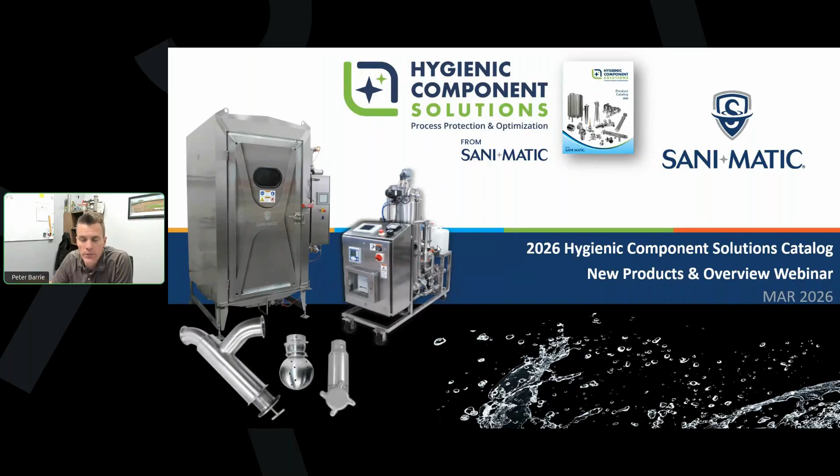Before we get into the agenda and a little housekeeping, just a couple slides on a quick recap of our 2024-2025 updates. If you have not joined the catalog webinar in the past, we do update our catalog yearly about this time. The new catalog came out in late February, and each year we have a handful of new products and new informational additions to our catalog. So 24-25, a couple busy years.

We made trap strainer spare parts kits. We added the angle line strainer drain sample port option for our angle line, so you can put a sample valve or a cap port on that. We are selling our slip collars if you're looking for a hygienic process connection to weld in, we sell those now loose ship.

We added our high purity products, so we'll go through the catalog section in a minute here, but our high purity is more for our pharmaceutical end users, and now we have a whole section for things like our high purity HALB strainer, our hygienic spray deflector, some directionally drilled sprays, some vents, process components like that.

We do have also small sections at the back on process tanks. Sani-Matic does build quick ship tanks for CIP or other process, so we added some information on that, on standard sizes, as well as our newer digital process recorder. If you're using any sort of paper chart recorders, the DPR or digital process recorder is a good option for an electronic cloud-based reporting upgrade from a paper chart recorder.

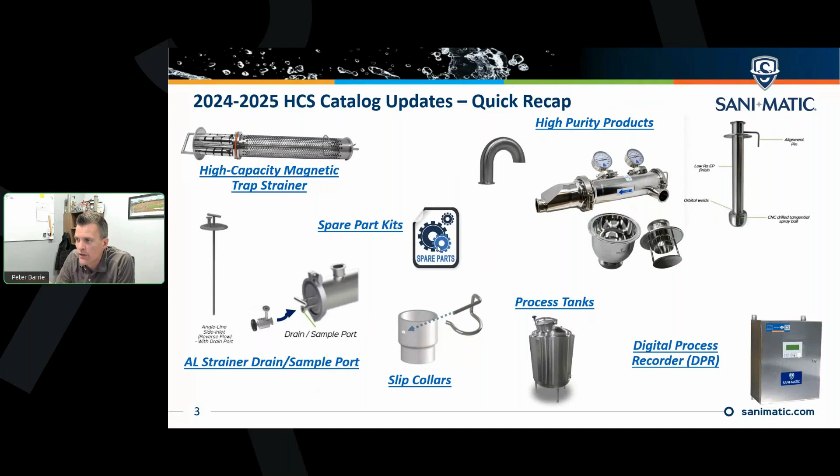And then in 25, more recently, we added a couple new options for our Y strainers, one of them being hot water jackets. So if you do have any products or applications like chocolate that you are straining out and need to flow through hot water to keep it up to temperature, that's a great option.

We revamped our sample valve offering, so a new lower cost, higher temperature offering. They're shown as the 1/2 inch, 3/4 inch tri-clamp sample valve, but we do have some larger sizes there on the process side.

We did add a new static spray ball option, a generic pattern 270 up, so those are good for more simple tanks. If you need to just clean with some cascading sidewall, but maybe don't have any agitators down below, those are good options for those type of applications.

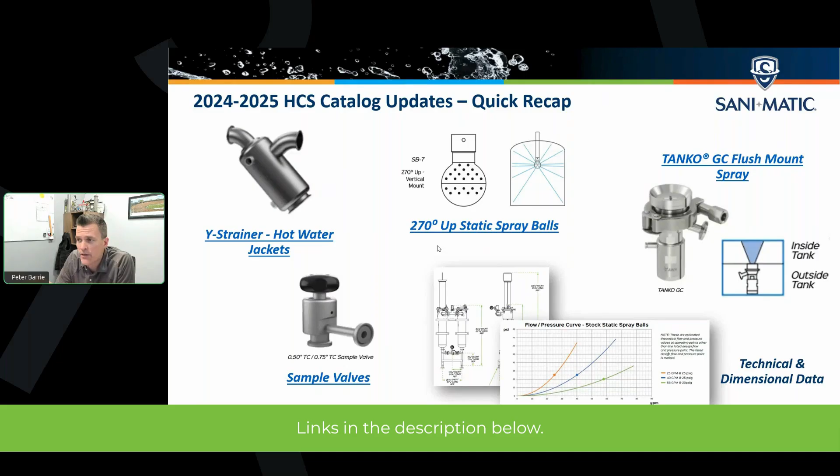And then we added a bunch of technical information, dimensional information, as well as a new Tanko GC flush mount spray there. So if you have any interest in any of these, I do have the slides in the attachment handouts, and all of those blue links will take you right to that section of the catalog.

So today's agenda: we will go through the new catalog, just a quick overview of the table of contents, talk about the layout and some of the products we have.

And then we'll go into some of the new topics here, MicroPerf strainer overlays and underlays, excited to talk about those, a good alternative to mesh overlays if you've used those in the past.

We have a new biofilm sensor, great product there, and new COP basket, new Y strainer hammer handle option, excuse me, a new ultra capacity angle line chill guard strainer, so a specific industrial application for those strainers, but we'll walk through those.

And then IOM manual access, we have those linked now throughout the catalog. And then some other new options: passivation options, differential pressure kits, some more technical information added to the catalog as well. And then we'll take a look at the catalog itself in the digital version, so show you some of the features in there.

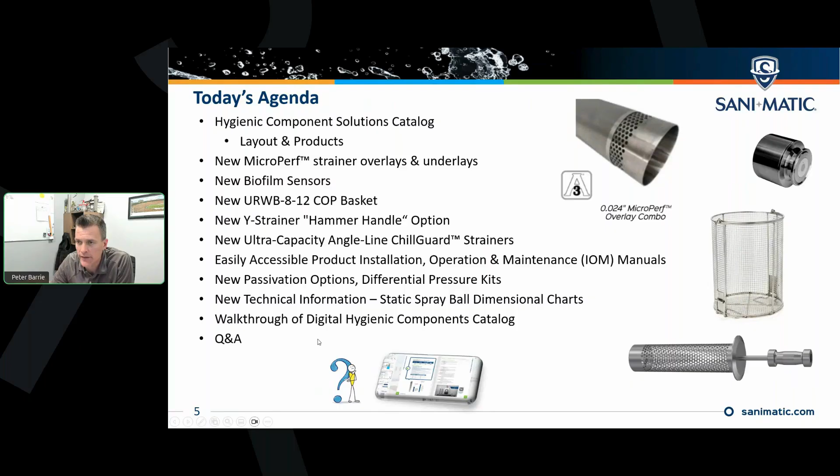All right, so we'll jump into it, just to orient those maybe more new to the catalog. We did revamp and readjust the catalog a couple years ago. We have 4 different sections here. The biggest section, kind of the meat and potatoes of the catalog, is what we call our hygienic components - everything from a lot of different strainer options: straight line, angle line, ALB, ultra capacity angle line, chill guard, T-line, Y strainers, basket strainers. So a bunch of different strainer options.

Our spray device offerings include our static spray balls, many different customizations there, along with rotary and jet sprays, and then some additional rotary and jet sprays as well. Supply tubes, and then tank components is that last section. We do have our tanker spray washers, so if you're cleaning out larger milk tanker trucks or other process hauling tanker trucks, that's towards the back. And then our newer biofilm sensors are in that section standalone, as well as some other accessories.

In this section, you will see at the end what we call a CDP, or component documentation package section. So if you're looking for anything like material test reports, 3A certifications, or sometimes weld log, weld map, finish, weld finish notes - any sort of documentation packages in this section, you do have to order a separate CDP. If you go to page 168, you can see the listings of what you get with our 3 different packages.

We also added a table, so not all products you can get every package with. If you go back to that table, you can see, if I'm looking at a biofilm sensor, which package can I get there? Make sure to remember to think about that before you order anything. And then some of our certification standards that we are adhering to with our products are also listed towards the back - primarily food and beverage, personal care, and nutraceutical oriented, a little bit of industrial as well.

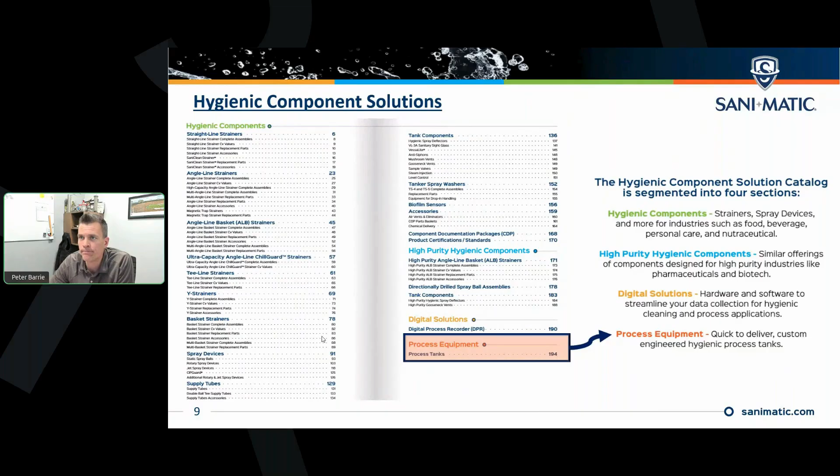So jumping into the new products here, first and foremost, we have our new MicroPerf overlays and underlays. I have a sample here too, and you see some of the pictures here, but high level, the MicroPerf is an overlay for our angle line or straight line strainers, or an underlay for our ALB or high purity ALB strainers. And if you use a perforated core, in this case I've got a 1/4 inch here, you can put the overlay or underlay on and do some finer straining.

If you are familiar with mesh overlays, and I've used those in the past, these are basically a mesh overlay, but much more hygienic. You can see the 3A authorization there - these are 3A certified. So if you're using a perf element and you use the MicroPerf overlay, it's going to maintain the 3A certification. From a construction standpoint, it's perforated holes, very small perforated holes, and you can see the 4 sizes that we do there, 024 all the way up through 050. The one I'm holding here for reference is an 024, so you can see roughly the size on that.

Construction of that is hygienic. If you're used to mesh overlays, those involve a lot of design construction that's cross overlaid and not as hygienic, and not 3A. If you're looking for something more sanitary, this is a good option. It's also easier to clean, since you won't get stuff stuck under the overlays like you would with a mesh overlay.

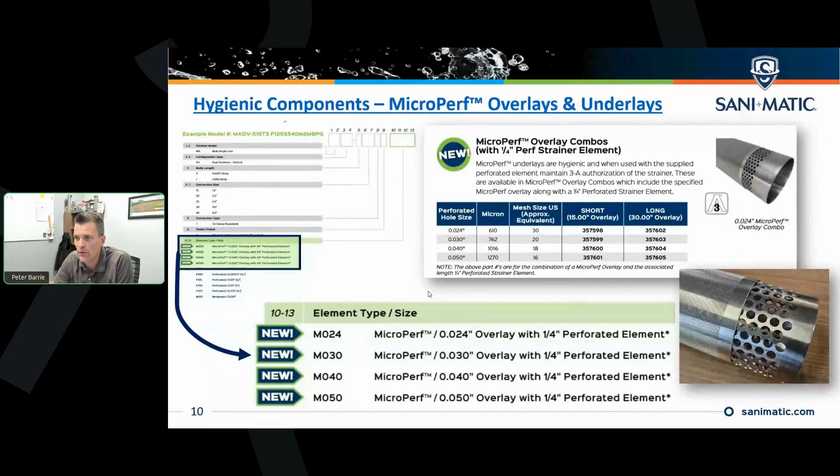And the underlays are available loose ship too. Let me go back here for a second - those are the main four sizes we have today: 024, 030, 040, and 050. We do have some other custom options available - if you're looking at Y strainers or some other strainers, we can do custom options. So if you have any questions and are looking for other sizes or other fits within our other strainer products, feel free to contact us.

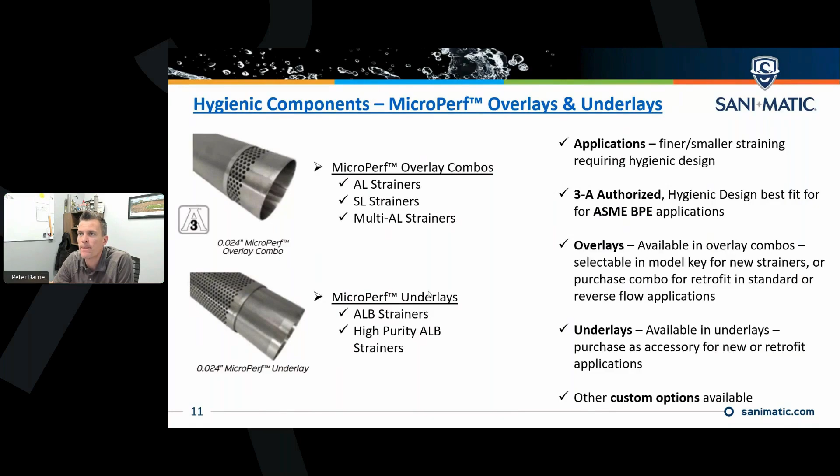So you'd either need to do some sort of CIP clean-in-place or biocide treatment. In this case, biofilm came back a couple different times, so that CIP or treatment would be implemented as well. The big advantage of this is that it's online and monitoring continuously.

So instead of having to do spot checks or not being able to see inside your process lines, you can monitor online. It does discriminate between biofilm and other kinds of deposit fouling, so if you're thinking about scaling or anything else, it has the capability to detect the biofilm itself too.

Early warning detection is also a standard feature, down to 1% of the surface coverage of the actual biofilm sensor surface. This helps to optimize the cleaning or CIP treatment.

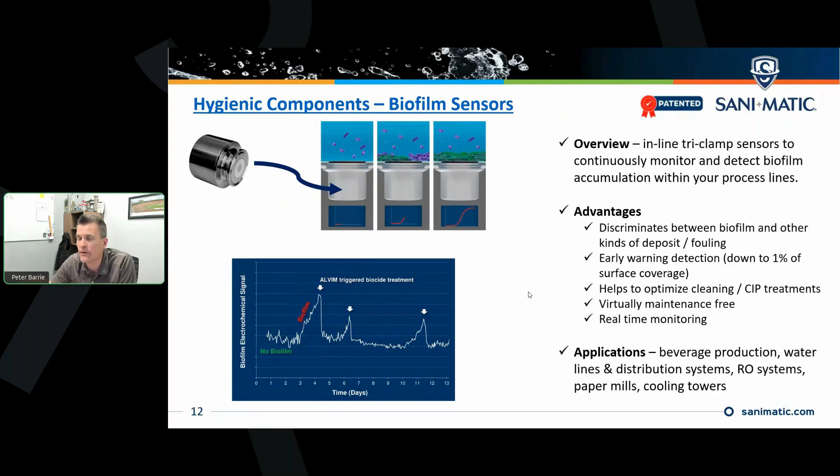The nice thing about this is that if you're in the food and beverage industry doing COP parts cleaning, a lot of times you do your chemical wash step within the COP, and then you are either manually rinsing or chemically sanitizing in a sink, tub, basin, or with a spray wand after that. You can fill up this bucket with that rinse water or sanitizing chemical, and then dip your parts into it.

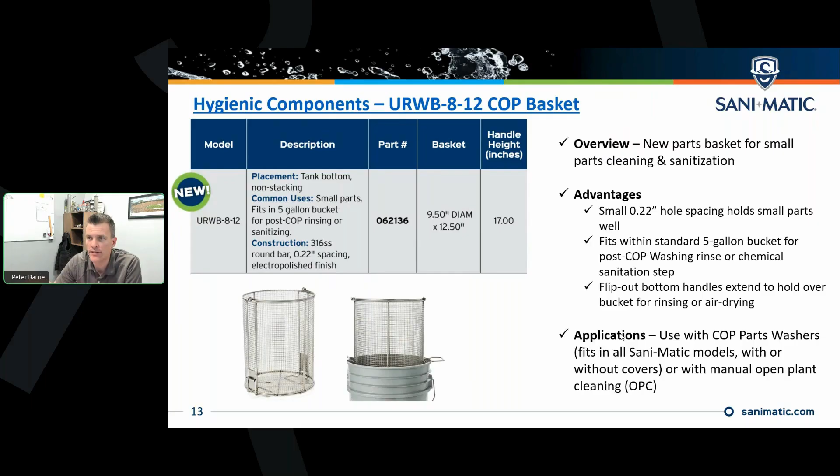Next up is a new option for our existing Y strainer. We're calling this the hammer handle. If you've had the issue of a sticky elastomer gasket - you put on a tri-clamp gasket, you need to take off that process connection and unclamp it, and it basically sticks there. You try to pull it off and it doesn't come off, that sticky EPDM typically gasket. If you've had that with temperature cycling or chemical usage, whatever it is, this is probably a good solution for you.

So instead of taking a screwdriver and trying to pry it out, this one has a nice hammer handle on it. I actually have it here, so I'll show you, and we have a video too. We're basically adding what we call the hammer handle onto our existing strainer, so the element stays the same, and once you're ready to remove that element, you can just pull it straight out, and that impact force pulls right out and unlodges or dislodges that gasket out of the process line too.

So let's watch the video because that's a good visualization.

So if you had that issue before, hopefully that resonated with you.

The hammer handle option is found within the model key of the Y strainer. So if you're speccing out a new Y strainer, you're going to see it as H250.

Right now we do offer it with our 1/4 inch perforated as a standard. We can also sell that loose ship too. So if you go to the accessory section and you're looking at the element section, you're going to see the hammer handle as well. If you want to retrofit a unit that you have out in the field, it could fit up with any existing Y strainer that we have.

As I mentioned, right now we just have it with a 1/4 inch perf. We can customize that. So if you like the option and want to do it with, say, a wedge wire on the Y strainer, or even some of our other angle line strainers or other strainer products that we have, just give us a shout and we can look at adding it for you as a custom item.

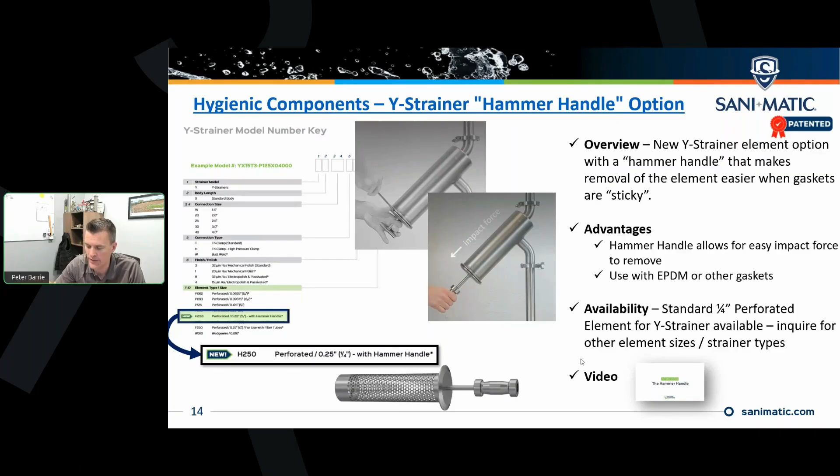Next up, we have a brand new strainer product under our Chill Guard strainer brand. We're calling it our Ultra Capacity Angle Line Chill Guard Strainer. It's a very large, hence the ultra capacity, 8-inch body strainer, specifically engineered and designed for liquid cooled applications, under our Chill Guard strainer brand.

Advantages for this one: maximum flow and minimal pressure drop in a relatively small footprint. It maintains the sanitary tri-clamp connections, but there's a little bit of industrial design on the inside, more for liquid cool applications.

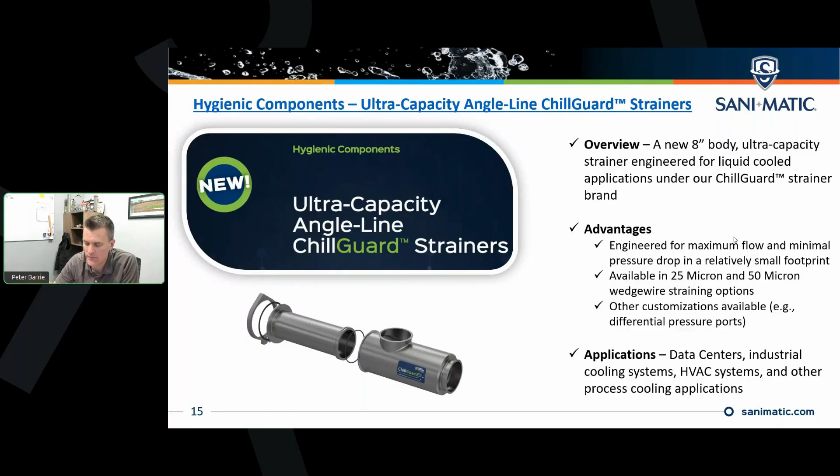Straining down to 25 micron and 50 micron are standard offerings. We can customize that, but that's an 001 and 002 wedge wire. It is a standard product, but we can do some customizations on it - for example, differential ports, other things like that too. So if you have a need for a liquid cool application, we have other sizes as well, but this is our newest and standard 8-inch Ultra Capacity Chill Guard Strainer.

Simple add, but something we hope is pretty useful. As you're browsing our catalog, sometimes you might not know about our resources page on our website that has all of our IOM manuals. So we wanted to bring those to the forefront on the component side as well.

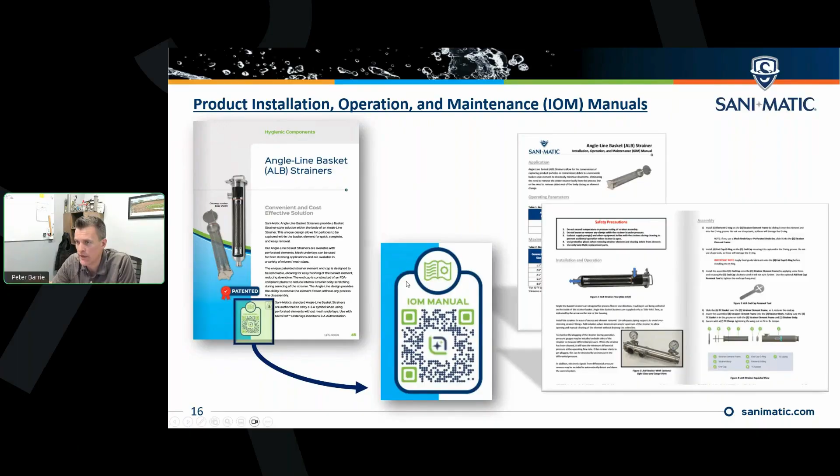Now when you're browsing through either a print version or a digital version, you can QR code scan this with your phone if you got the printout, or it's a clickable link on the digital version, and any of our sections that has the supporting IOM manual, you'll be taken right to that. In this case, the ALB strainer, you can see it's at the front, and if you click on that or scan it, it's going to take you over to the latest and greatest IOM manual that we have. So hopefully a quick reference guide for you, easier access to our IOM manuals.

Couple different option adds throughout the catalog, not just to one product, but to a couple different ones. Passivation is one - we've had the passivation option for, I believe, our static spray balls and a couple other products, but we wanted to bring that across all of our strainer products and our spray device products. You should see that service at the end of a section.

So if you're looking at, for example, angle line strainers, you'll go back at the end and see a services table, and you'll see passivation. In this case, we have two different line items because there's different pricing for the angle line strainer and then the high capacity strainer as well.

Passivation, if you're not familiar with it, improves the corrosion resistance of the stainless steel - great option in the sanitary world. Sometimes people are doing passivation as part of a new project installation, so they don't need that or don't want that. But if you want to have that, we are happy to add that as well. You're able to add that to any of our strainer sections as listed.

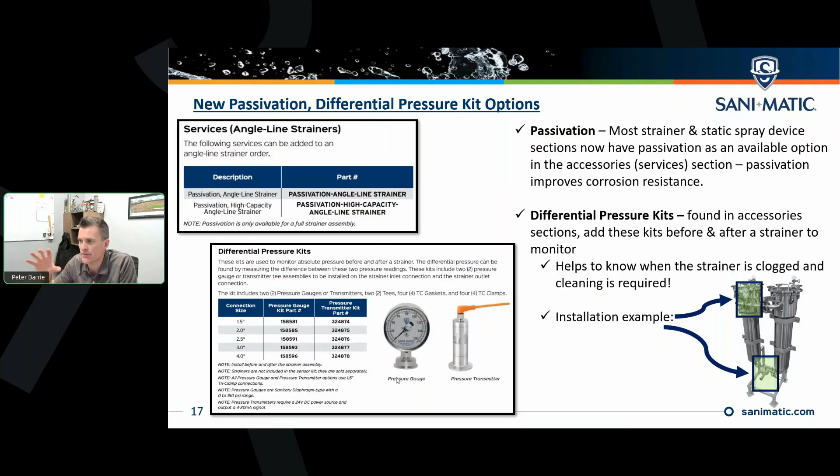As I mentioned, that helps you know when the strainer is clogged. When you first fire up the strainer and start flowing your water or your process, you're going to see a certain pressure drop. We call that a clean pressure drop. Sometimes it might be 1 PSI, might be 5 PSI, depending on your flow rate and viscosity of your product. Over time, when that starts to creep up and you see it visually going 6, 7, 8 PSI over your clean pressure drop, that's when you know your strainer is clogged and you want to stop your process and clear it out.

On the hygienic component side, we did just add some dimensional information for our static spray balls. Previous catalog versions on these spherical ball type units just had our slip collar connection. On the top left, we get a lot of inquiries for the butt weld, flare, tri-clamp, half coupling, and pipe nipple connection styles. So we went through and added all of the dimensional information for those, and that is now found in the catalog. If you're looking for dimensional information, you can grab all of that here.

The slip collar for the tangential and the bubble type are also still available too. So if you're looking at bubble type spray or tangential type spray, that information is in here as well.

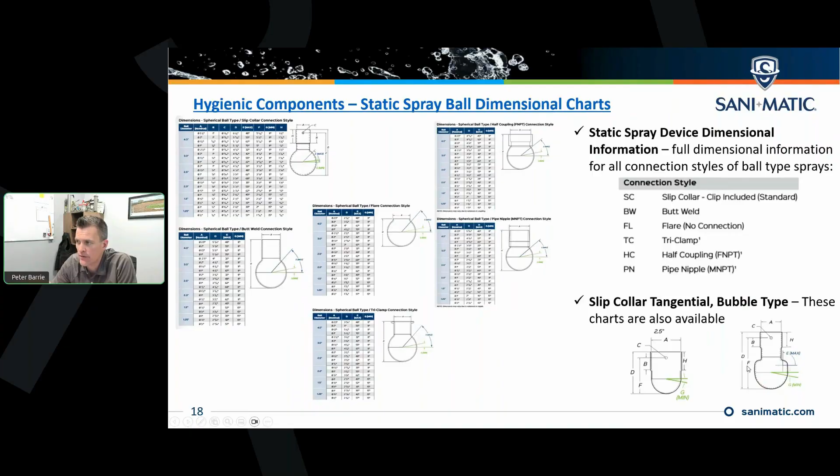Just a quick walkthrough of the digital catalog if you have not seen it. So the link, as I mentioned, is in the handout. You can get to it a bunch of different ways. If you search our website, it's going to be found in a lot of different places, or just search up Hygienic Component Solutions Catalog and you'll find it pretty easily.

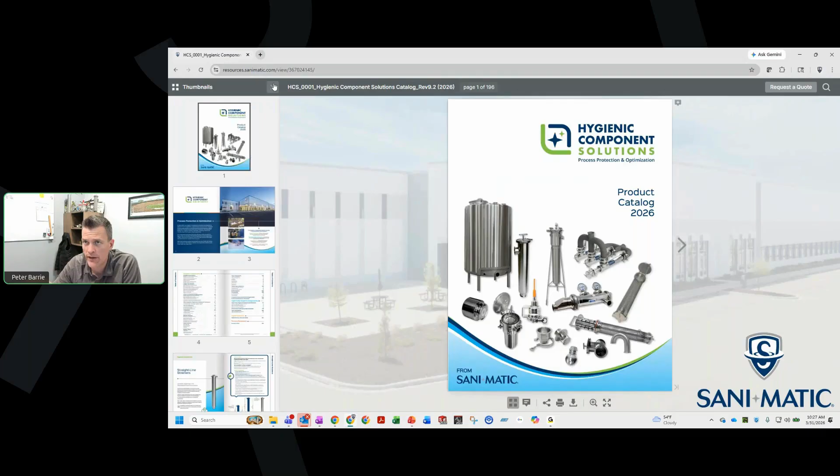So the digital version has a bunch of different tools here. You can scroll through the thumbnails pretty easily and find something quick. If you want to hide that, you can do so. If you're ever looking for something and want a quote, pricing, or have questions, on the top right here is request a quote. That'll bring you to our contact us page, and then we can help you out with pricing, delivery, or technical information.

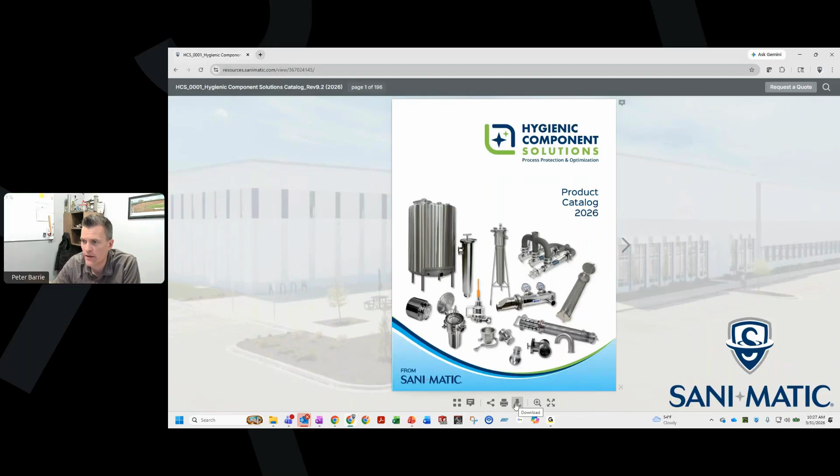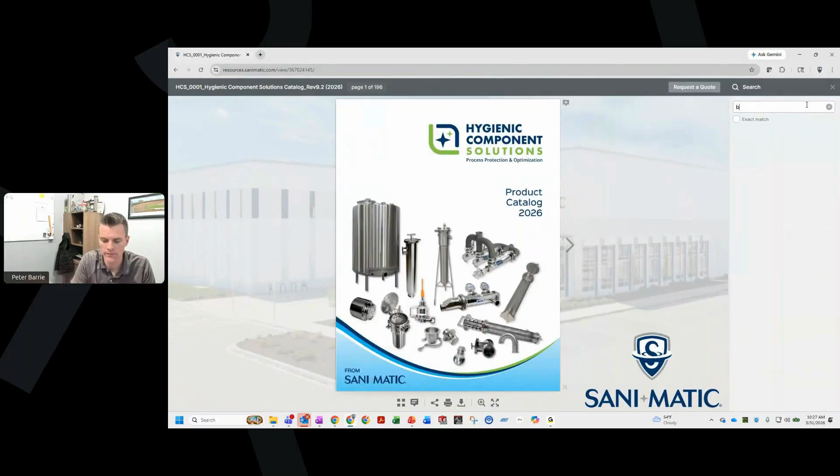On the catalog itself, a couple of things here on the bottom: you can share, print, or download the whole catalog. So if you want an offline PDF version, you can do that here. You can also download, print, or share certain pages too. So if you're just looking at, for example, an angle-line strainer section or a biofilm sensors section, you can do that here as well. Search function is pretty powerful, pretty nice, up top. Like any search function, if I'm looking for my biofilm sensor, I can come over here and jump right to it and then close that out.

I did mention too, we push people towards the digital version because we do things like embedded videos. For example, on the biofilm sensor we have a product video in here that's 4 minutes, so I won't walk through the whole thing. But as you're going through and looking at all the different products, if we have any retrofit videos or product informational videos to help support the product, it's going to be found within the catalog. And as I mentioned earlier, things like the IOM manuals are clickable links here, so you can jump over to that.

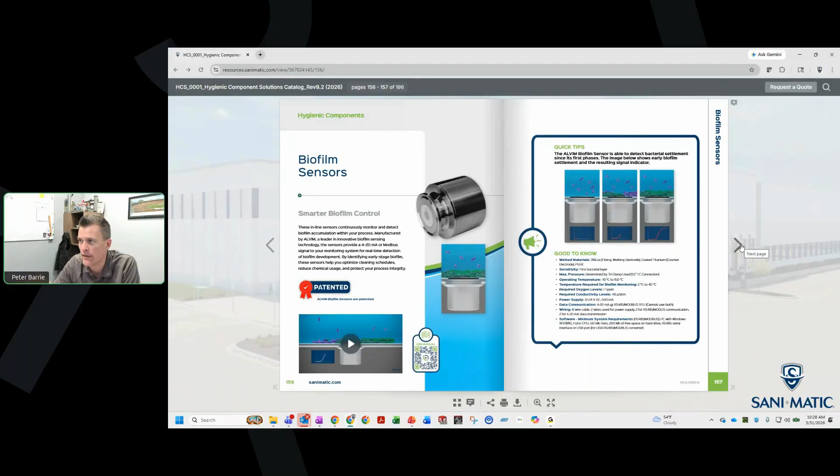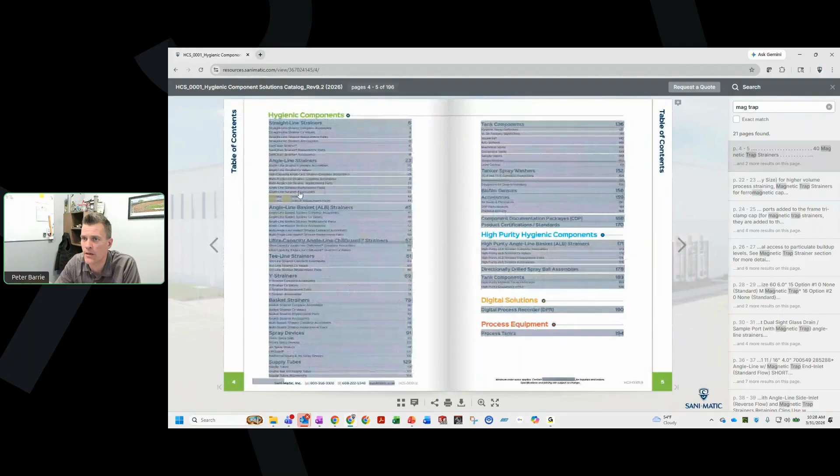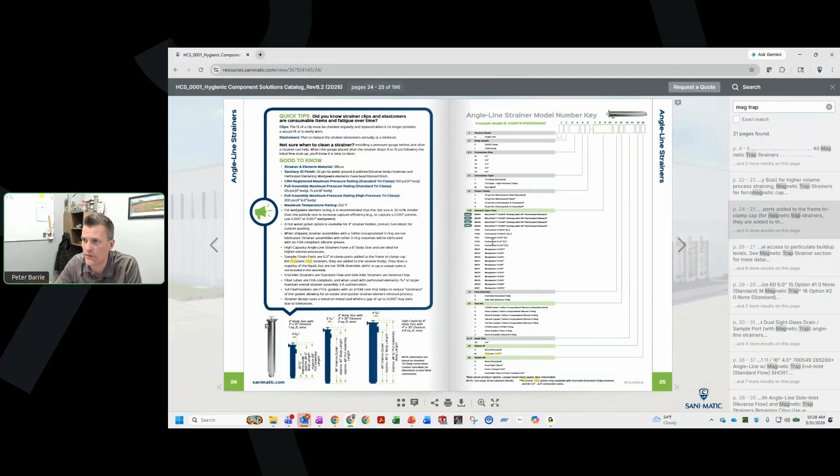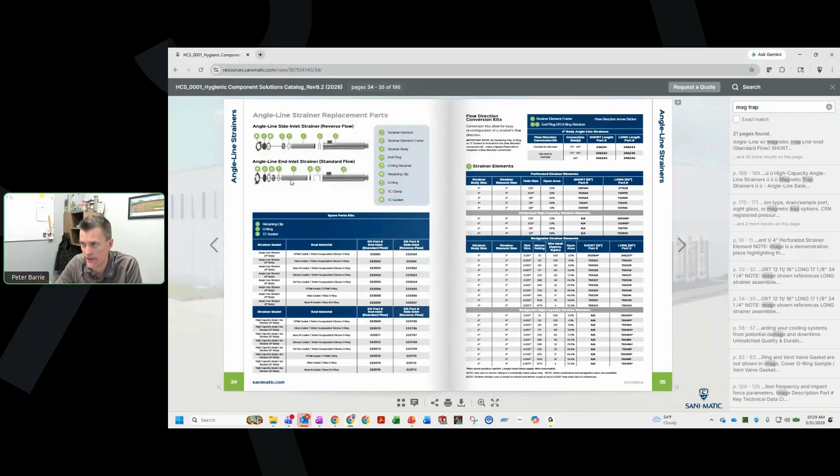I'll just go to one of the sections, let's go to the Mag Trap Strainer section. So just to show people how our catalog's laid out, if you're not familiar, if you're looking at an angle-line strainer, you're going to find a lot of technical information up front. If you're specifying a new strainer, the model number key is the place to go. As you go through here, you build up your different element types, connection sizes, things like that. After that, you'll find pressure drop information, and then a lot of different replacement part information. So if you're ever looking for a body, a clip, or a gasket, you'll find that in here as well, along with a lot of different element types and sizes.

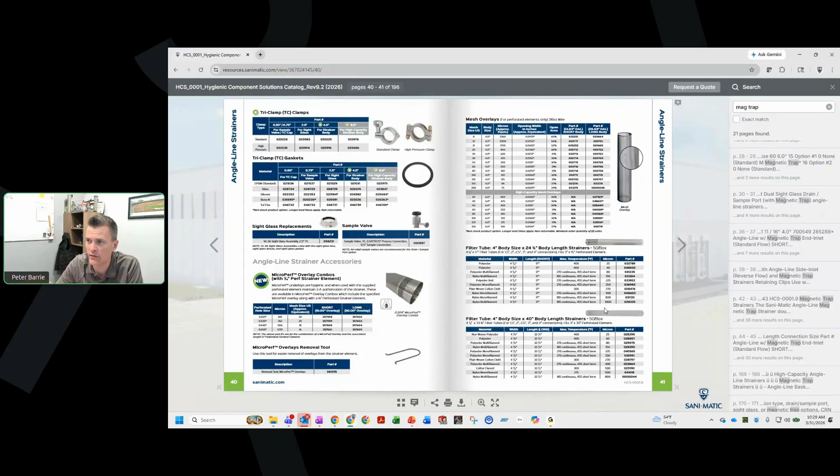So there's a big table of information with each of these sections. After replacement parts, if there's any accessories, we're going to list them there. For example, on the Angle-Line strainers, the MicroPerf would be considered an accessory because you can add it on to the configured model or get it loose ship. We do have a removal tool with that to make the removal a little bit easier. Things like mesh overlays, filter tubes, differential pressure kits, caps, ID tags, and some of the services too are going to be found at the end there. So the configured model key is where you're starting for something new, replacement parts for any replacements, and the accessories place is a good check to add anything else you might want.